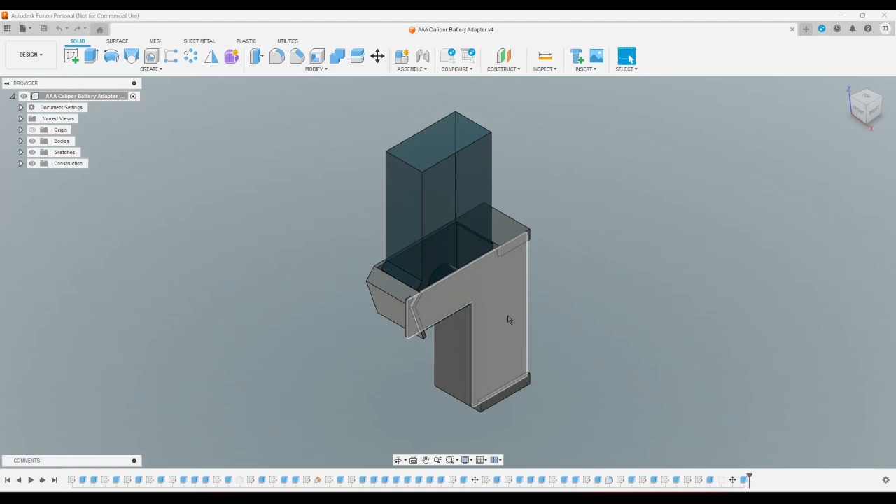Okay, so I think I'm getting closer to something good.

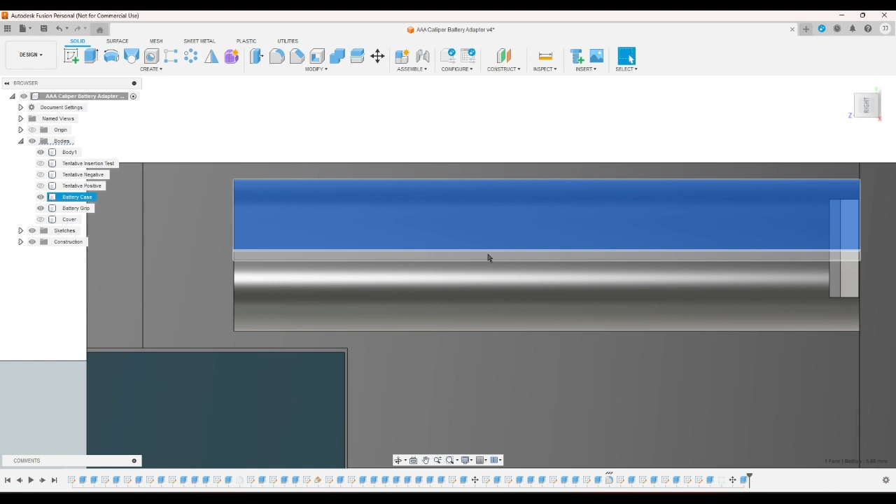But now I need to change this hole here to be bigger, just a little longer, so that the battery goes in and out the way it should. At least the way I think it should.

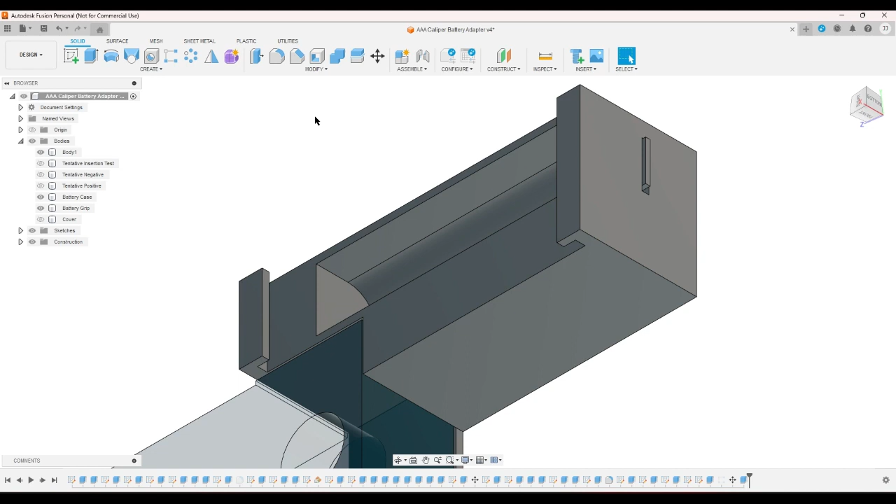So honestly, I can just extrude this by like negative some number, like 5 millimeters. That's quite a lot.

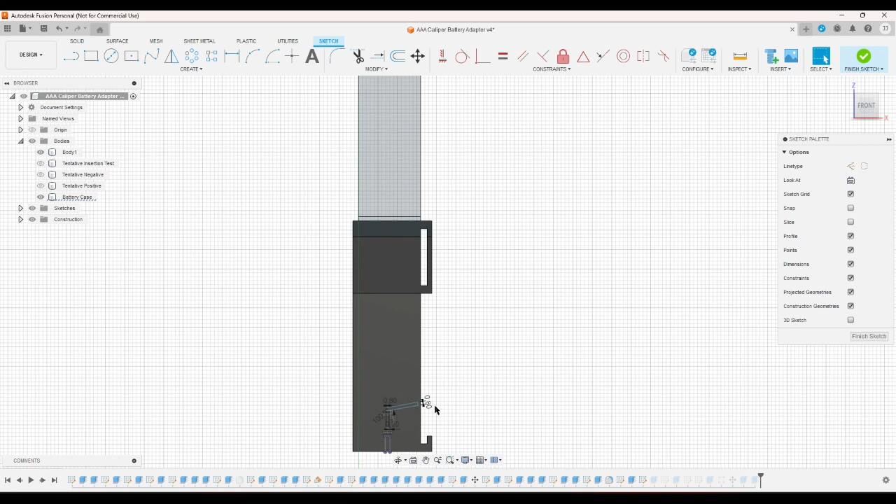And then if I change this so that the angle is more like 110. I don't know, I'm just eyeballing it here.

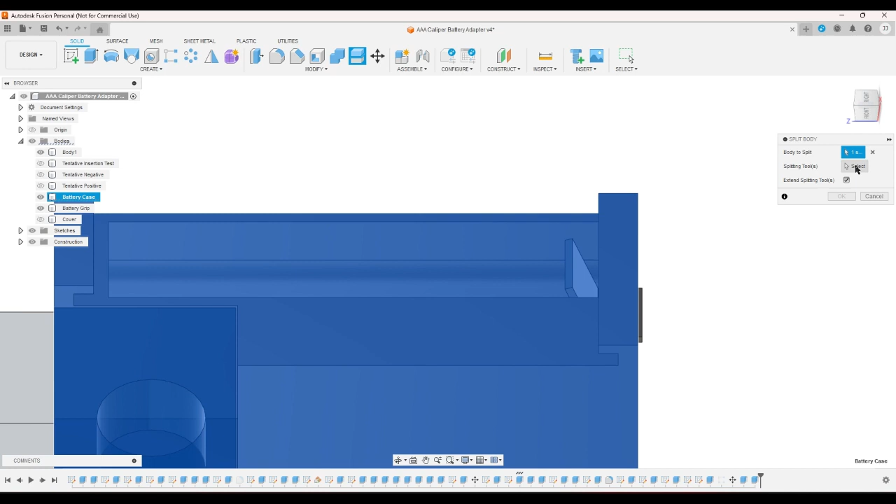And then I go ahead and I split this body using this plane. Alright.

That ought to be enough for me to test whether the thingy works. But now I'm going to go ahead and suppress the split real quick.

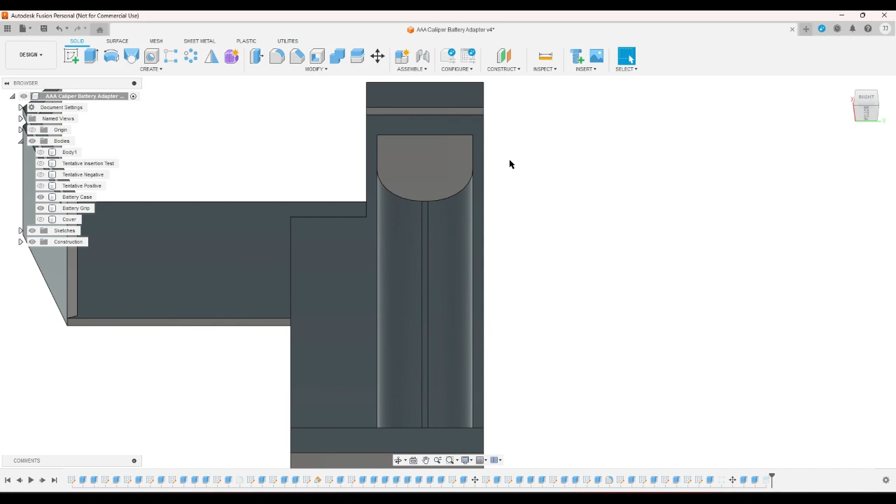Because I want to add a hole that is about here. Let me go ahead and project this line here.

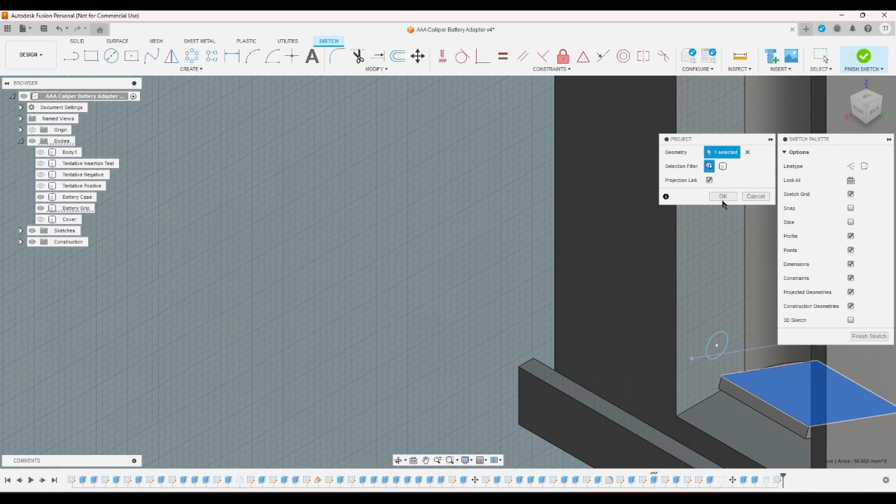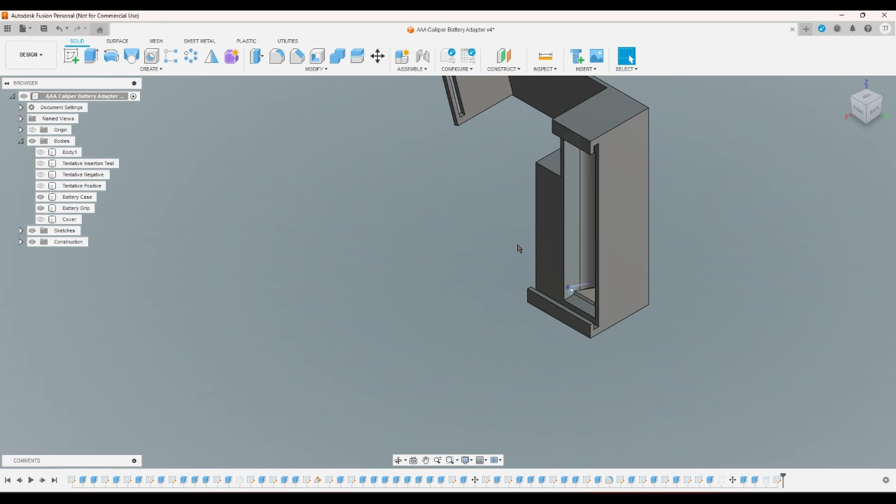Yeah, I'll go ahead and put this hole below the line. And I'm just going to make it 2 - 2 ought to be plenty. That's going to be for the wire that's going to come in on this side, that's going to connect to the battery on this side.

And then put a sketch here. That's also going to be just a hole.

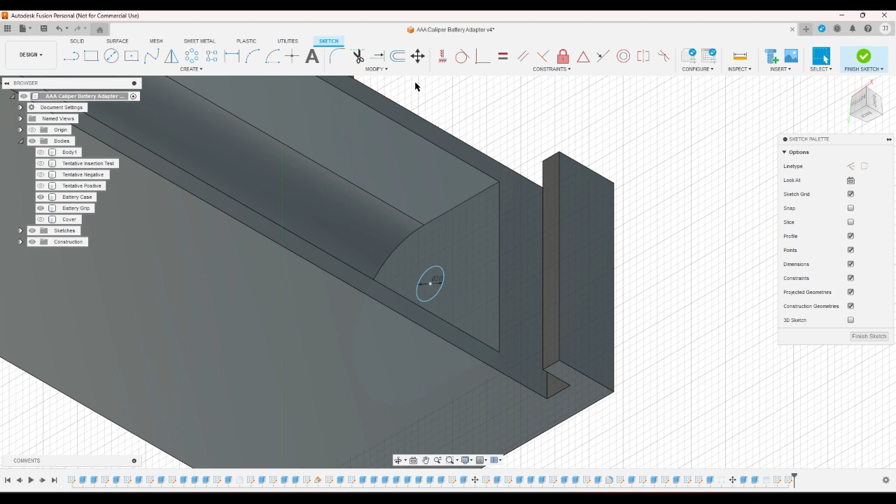Gonna go ahead and put this on the same. Okay. And then

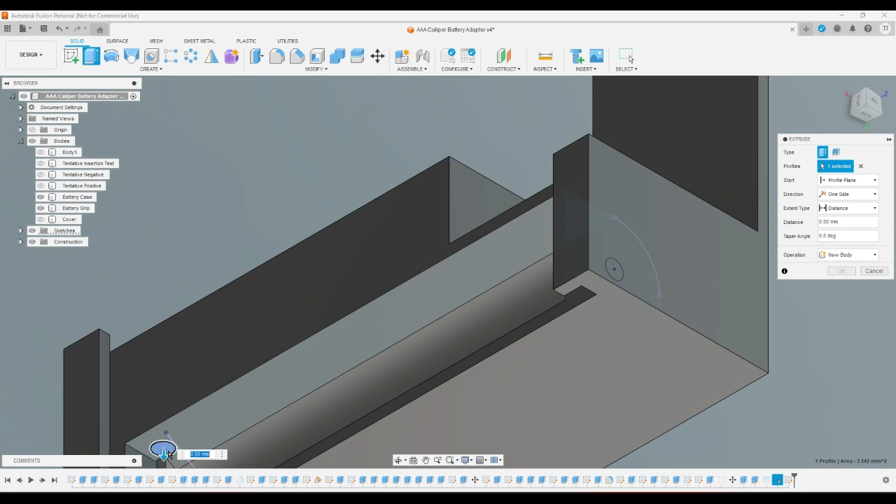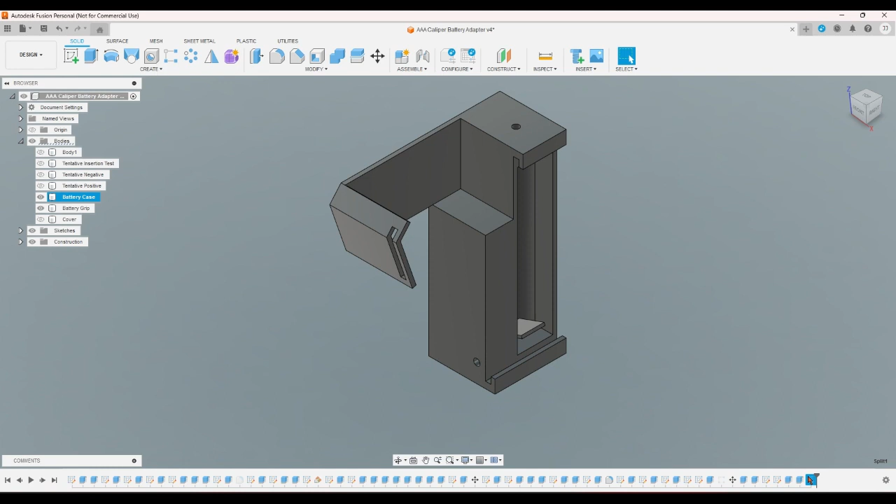Cut that through, and cut that through. Alright. And then move all of this to before the split and then unsuppress the split. Alright.

I may change depending on how I feel. In fact, you know what? I'm going to do that now.

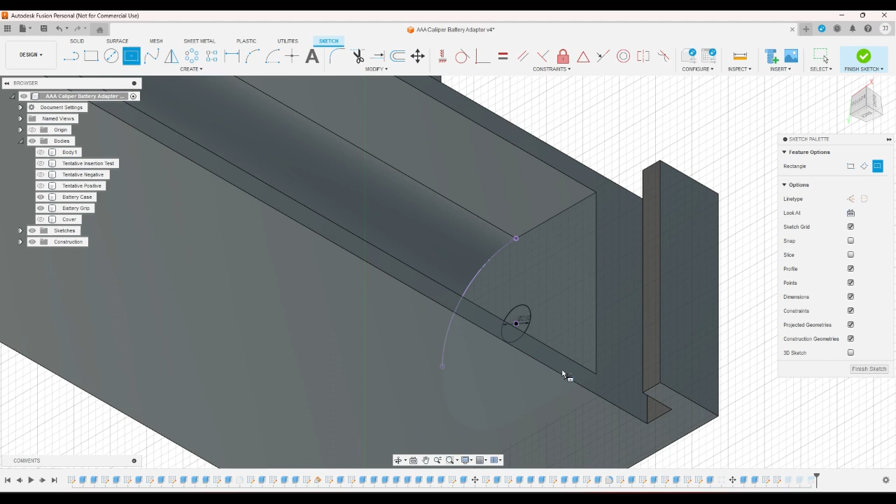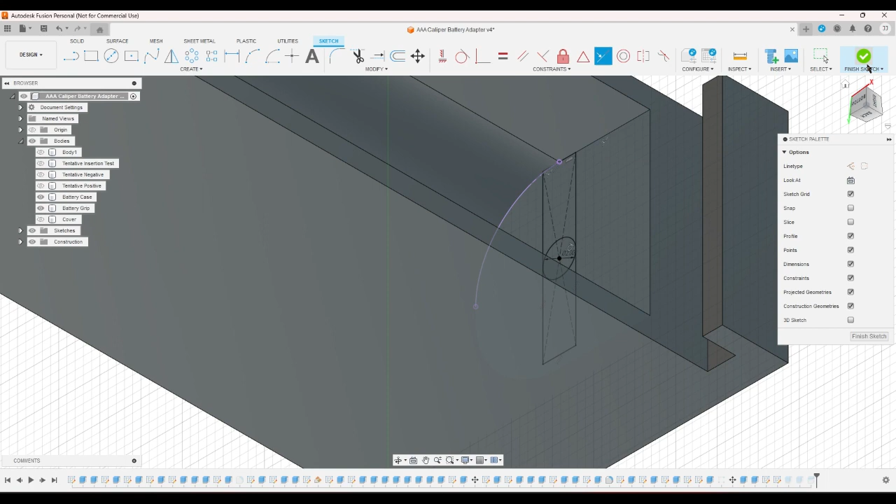Okay. There. And then - wrong one, this one. Yeah, so what that is, that is too big.

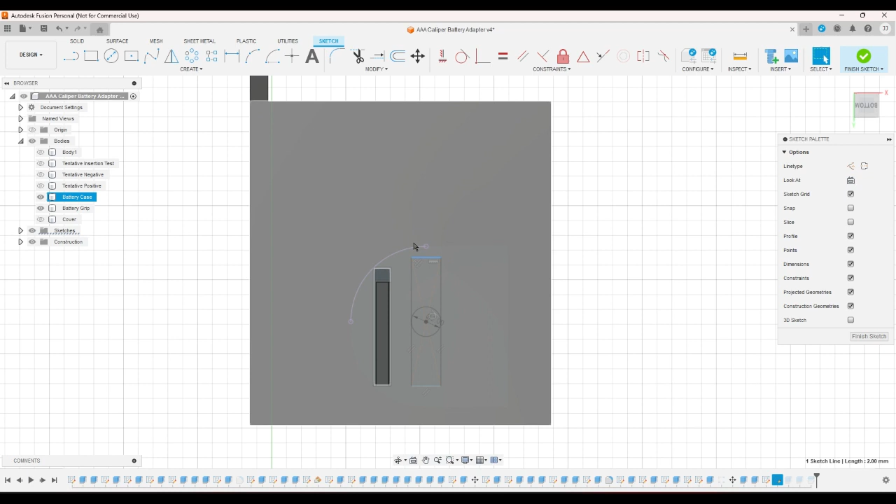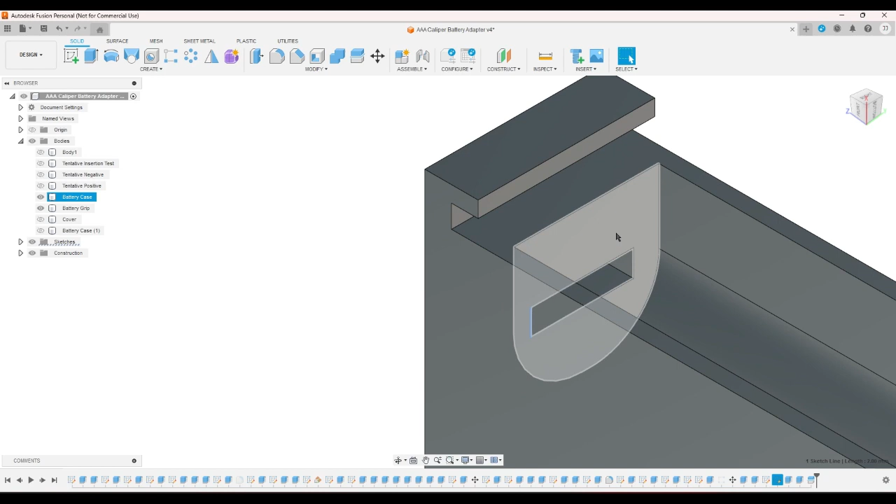Okay, so what that is instead - so the original plan was stick wire through the hole, solder it to a piece of aluminum, super glue the aluminum to this face here, and then do the same thing on this side. That should still work on this side, except instead of gluing it to the face on the thing, I'm gluing it to this little springy bit.

That should still work on this side, but on this side, I think it'll work better if I super glue the aluminum. Let's see, how do I describe it?

So I was going to stick the wire through here and then solder it to the aluminum. And then there was just going to be like this plate, and then they would have to have a glob of solder and wire underneath it sticking out. I'd like for this to be flush.

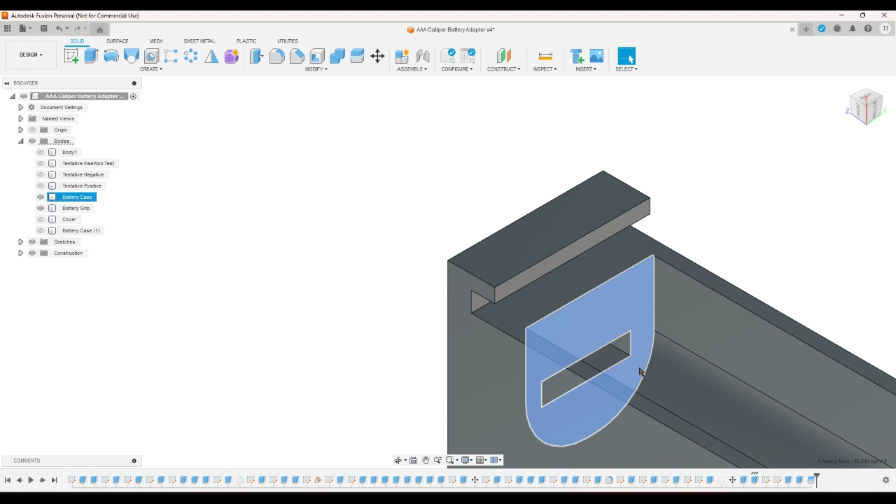So what I'm going to do instead is kind of fold up the aluminum in such a way that most of this face is covered, right? And then it'll stick through into this hole, right? And then when I solder the wire to the aluminum, it should be fine.

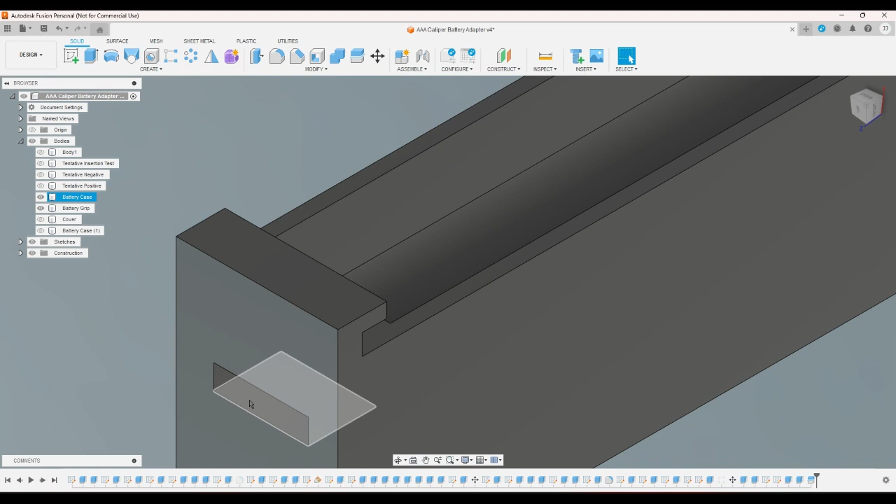Honestly, if I do it well enough, I could fit it in here. Anyways, but yeah, so I'm gonna go ahead and print this and test this.

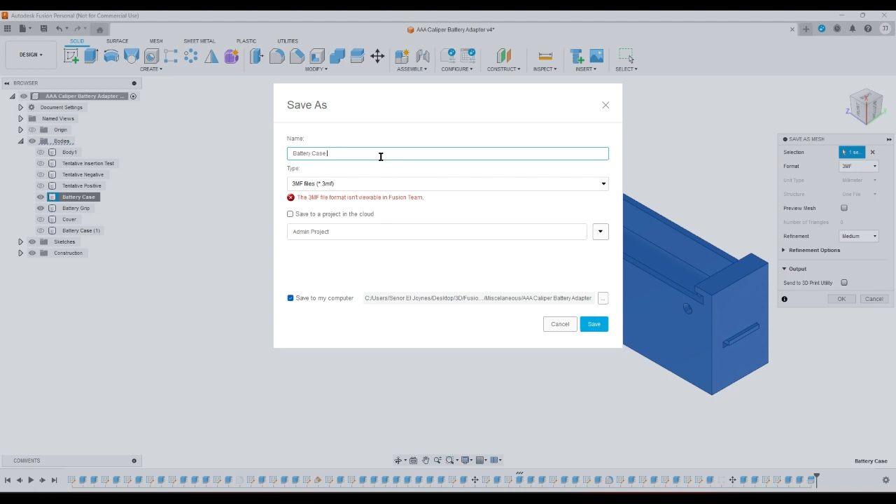So battery case, save that. Battery case test. Battery grip, save that. Battery grip test.

Alright, and then I'm going to go ahead and slice this and print this, and then I'm going to test it, and then if I need to change something, I will change it.

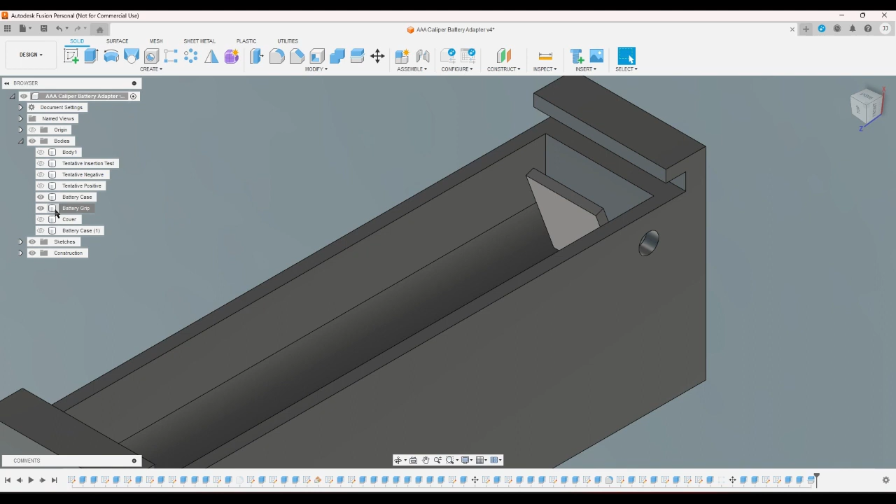Things that I can probably change are this angle here, and you know what? I might want to do that.

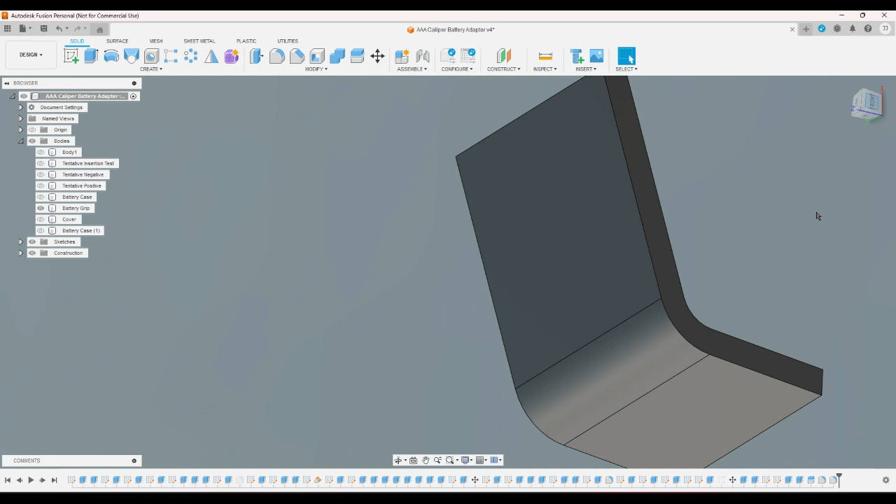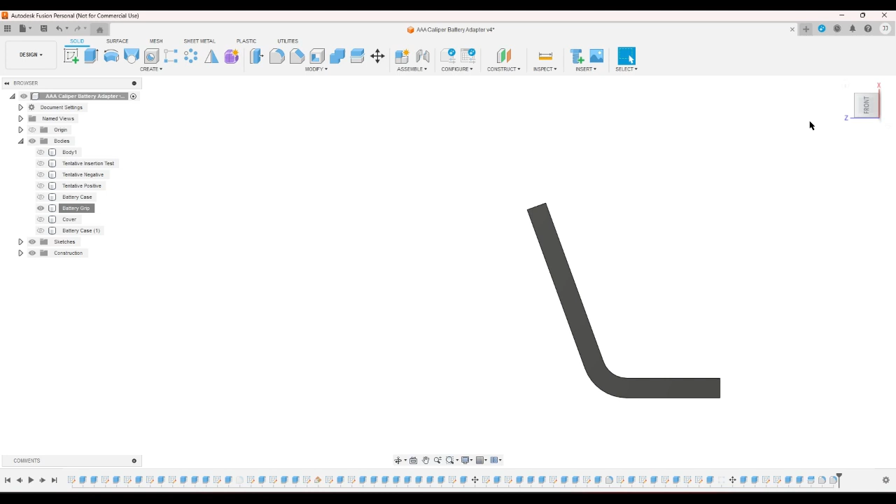Yeah. Yes, replace that. So what that should do is make it less flexible. I'm thinking that's going to make it easier, better at the job that I want it to do.

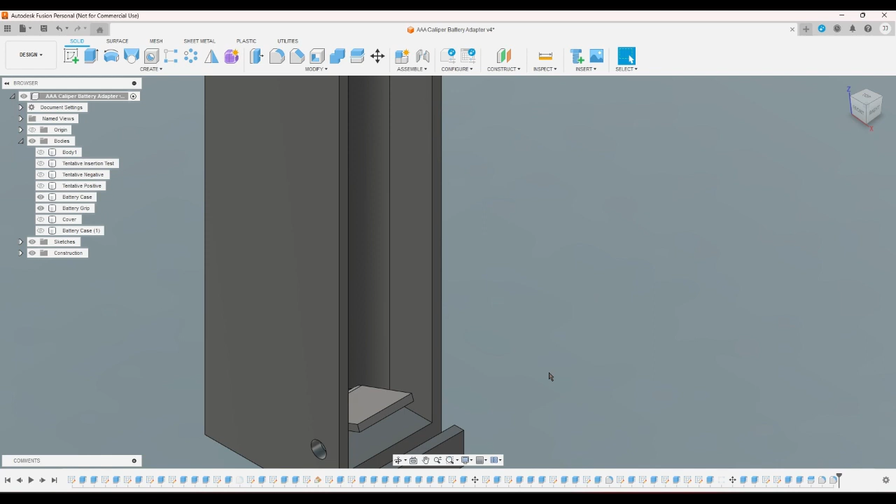Yeah. Okay, so now I'm going to go ahead and slice this and print it.

Okay, let's see. Battery case test and battery grip test.

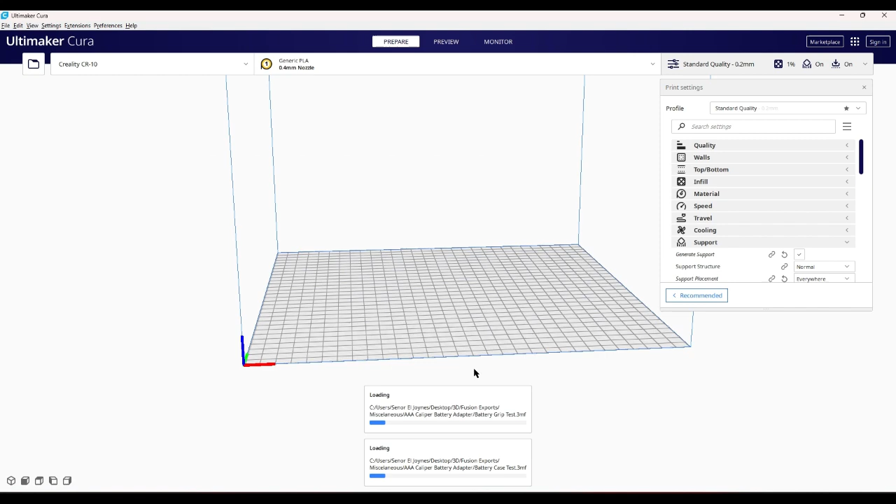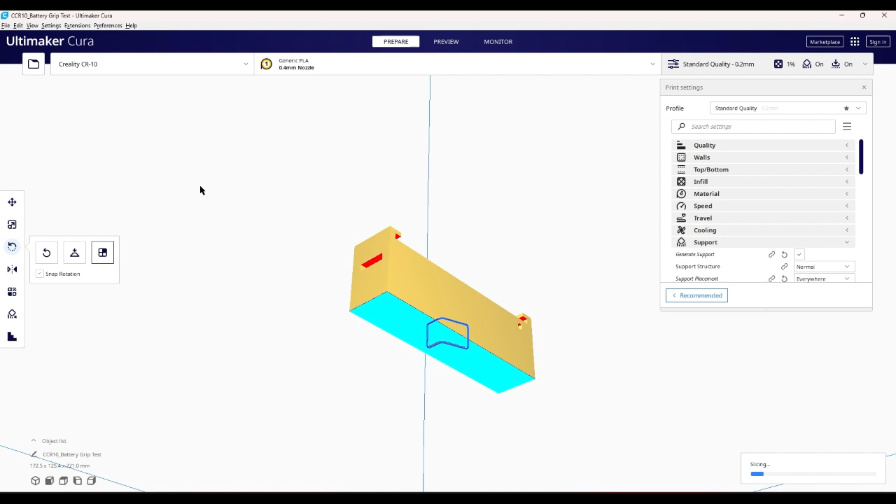This goes on this, goes way the heck up. And then this goes on this, and also needs to go way the heck up, and a little bit this way.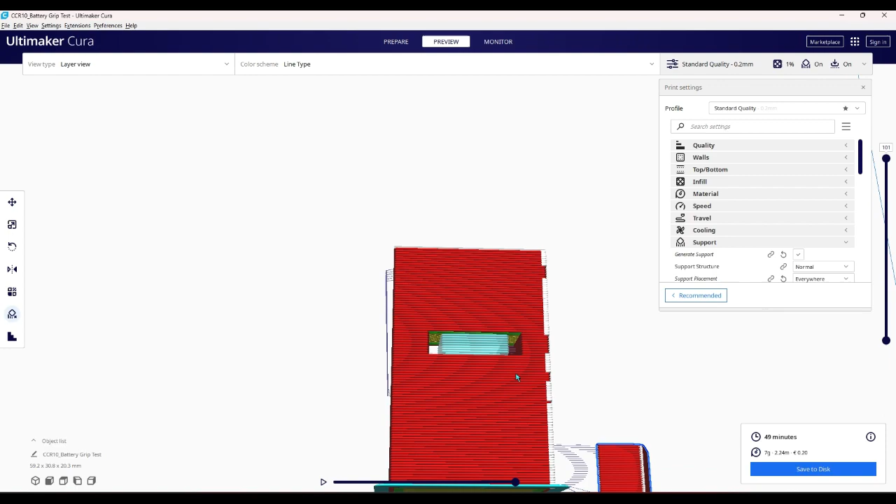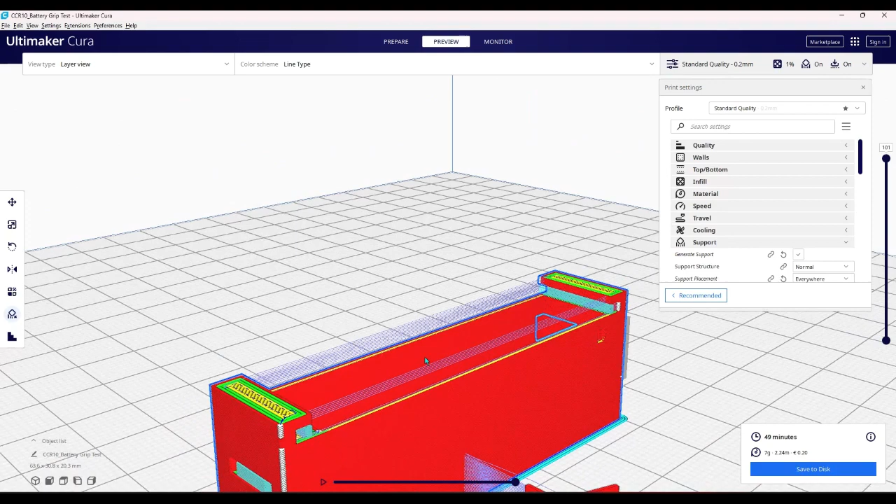Gonna block the supports here. And here. Blocker here. All right.

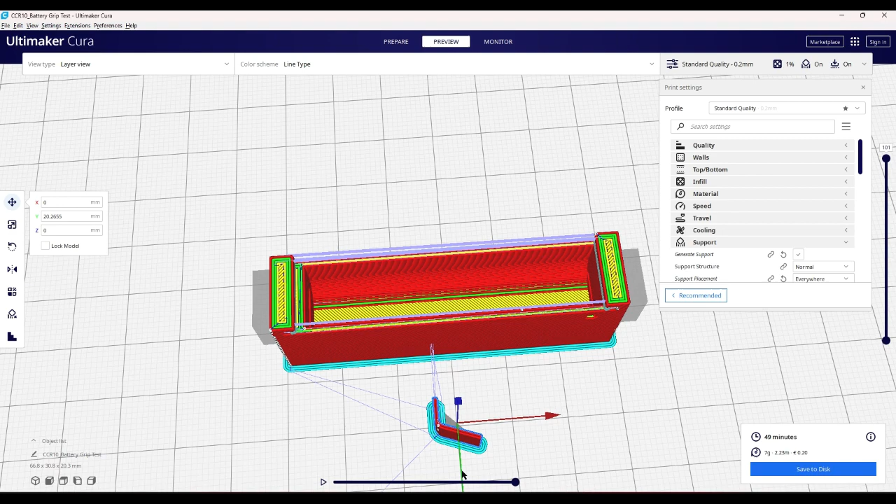And then I'm gonna go ahead and move this close enough to the other one that the brims should touch. And that way, this one pretty much has no chance of falling over.

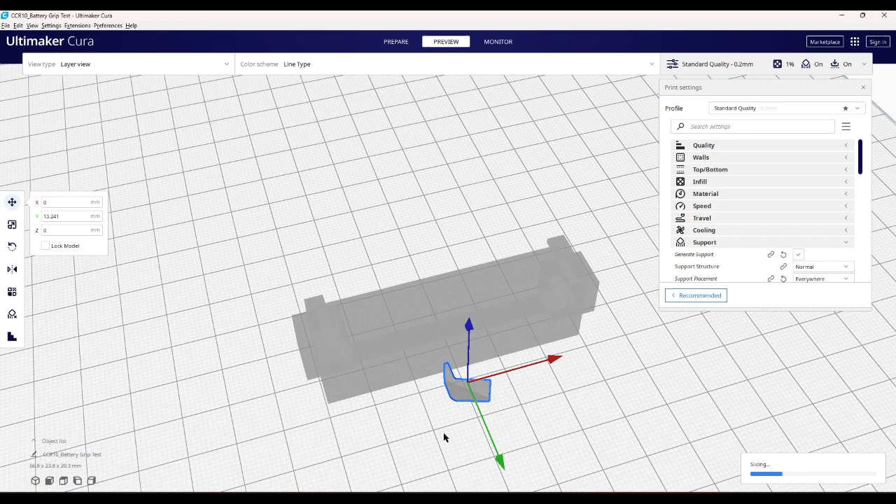Why is it taking so long to slice all of a sudden? Oh God.

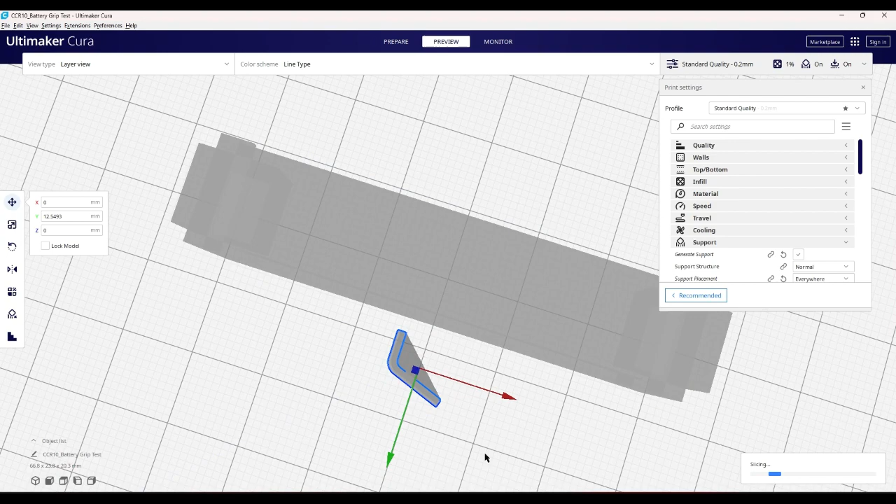So how does the support blocker work then? Is it like... Huh, whatever. Okay. And... not quite touching. A little more. Yeah, that was good. Okay.

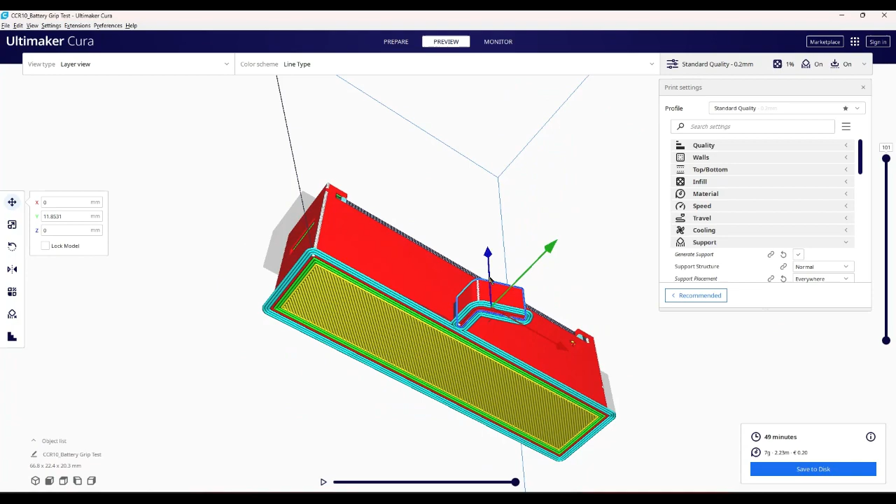See, because now in order for this to fall over, it would have to either completely disconnect from the brim or bring down the whole brim, which it's not gonna do. I don't think it was gonna fall over anyways, but, you know, extra security.

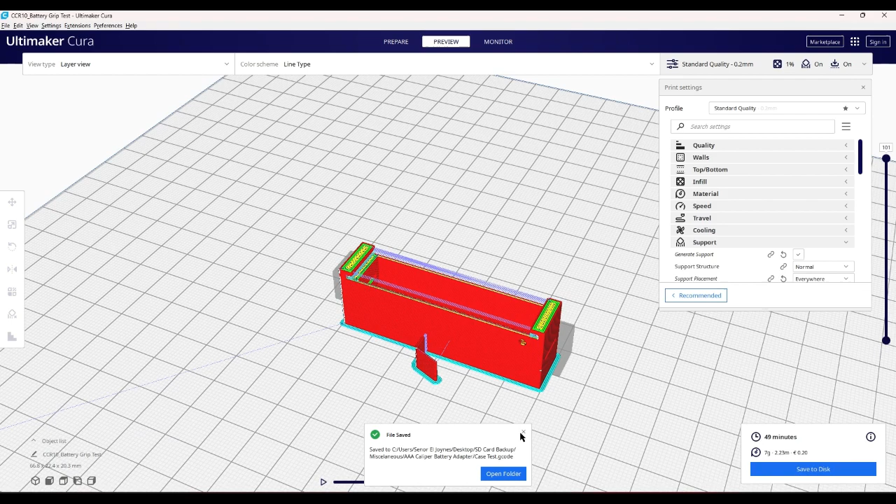Okay, save this to case test, I guess. And then I will hopefully have something I can test in about 50 minutes.

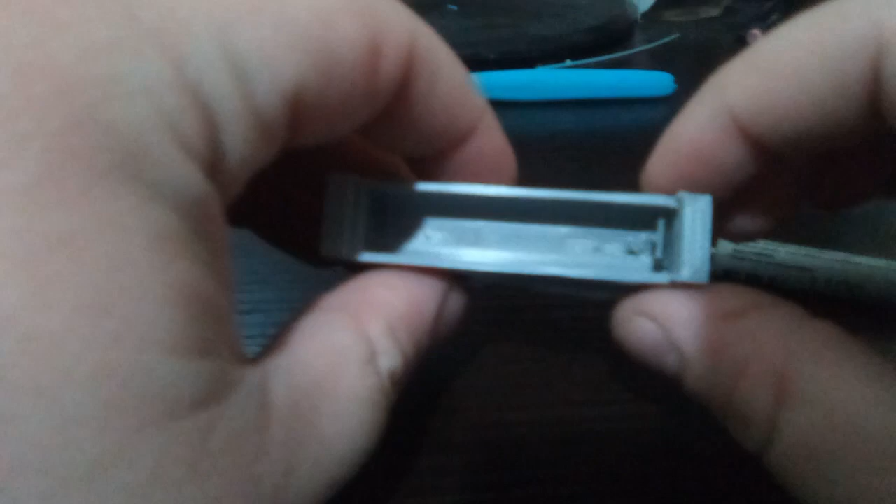Okay, so this case test got printed. I've got the little springy bit in there, and it springs. It's too long though, so I gotta make it shorter. But it's also a little too skinny because it just won't - it grabs on a little too tightly to the battery from these ends.

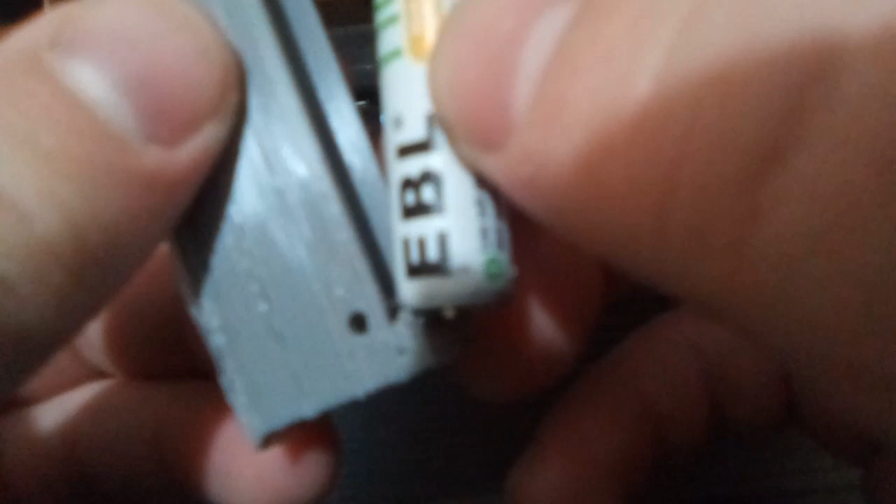But if I put it in this way so that it doesn't go all the way down - if I put it in like this, the spring springs, so that's nice. So I just gotta change the length and width of this, but everything else should be fine.

The holes here, where's the... here it is. I can fit a wire through the hole here, and then that could in theory go here. I can fit the wire through here, and then that could come back out like about there. Yeah, like about there. And then that would be able to be how I connect the battery to the actual caliper there - calipers, whatever - using a piece of aluminum foil soldered onto these wires.

So, I forgot to change the print settings though for these, and so it still has print quality issues. I'm gonna try printing it hotter because I think it's under extruding, and if I print it hotter, then the flow...

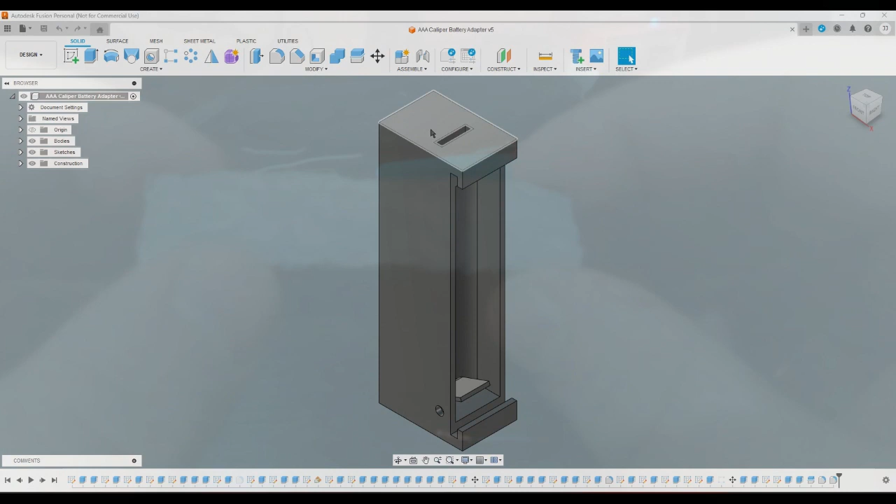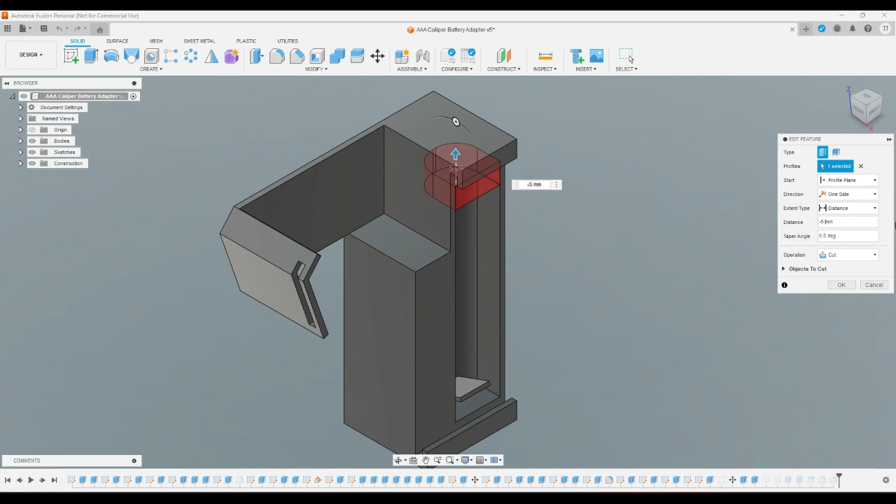Okay, so I should just have to change two little numbers here. So that would be okay. Minus 6 was too big. Where's the... so let's try 2. And then...

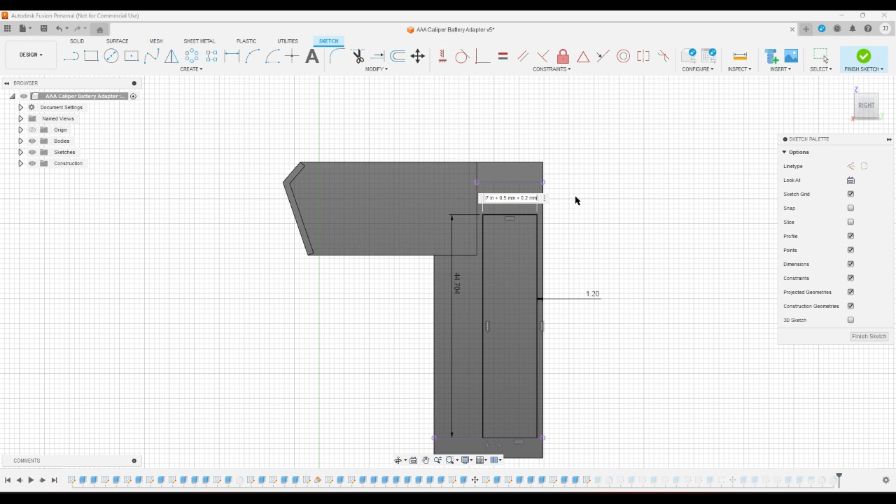Where is... is that it? Okay. That needs to be bigger by just a little bit more. Space plus space 0.2 space millimeter. Okay. All right. And then that will make this 1 millimeter on this side, which is not that big a deal, but meh.

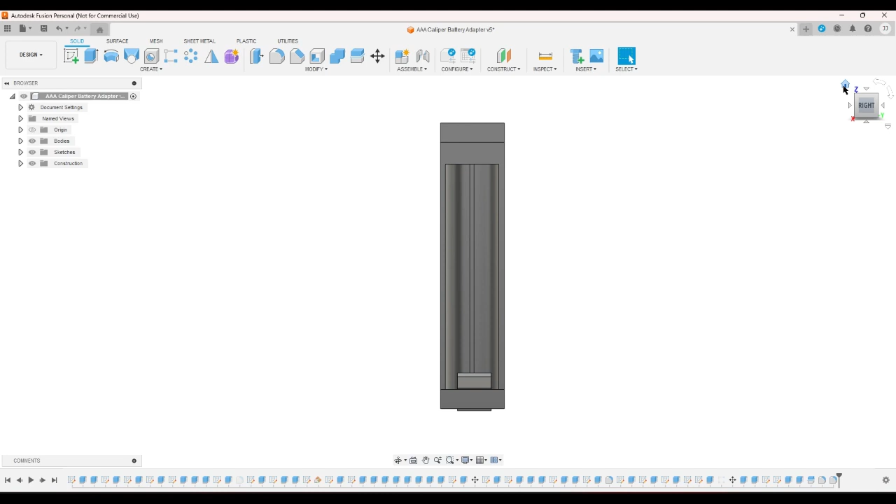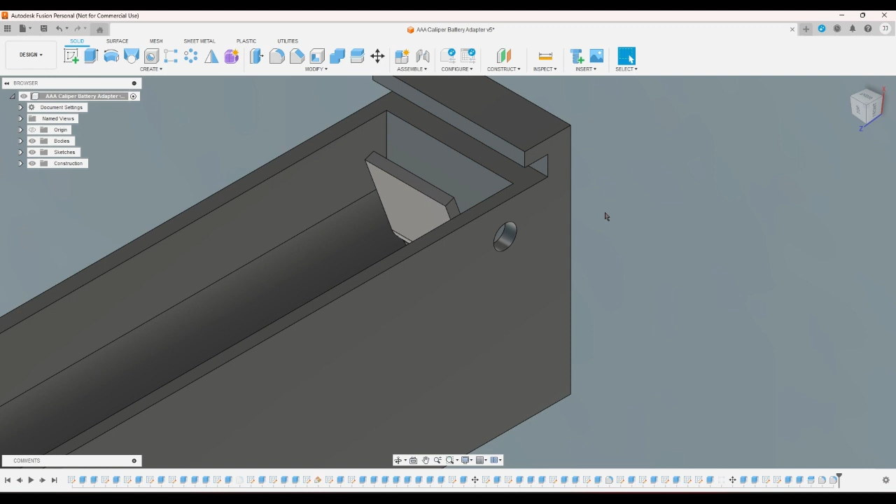Because those were the issues that I found, I am happy with this. I'm not even going to print another one. I'm just going to reuse the other one that got printed.

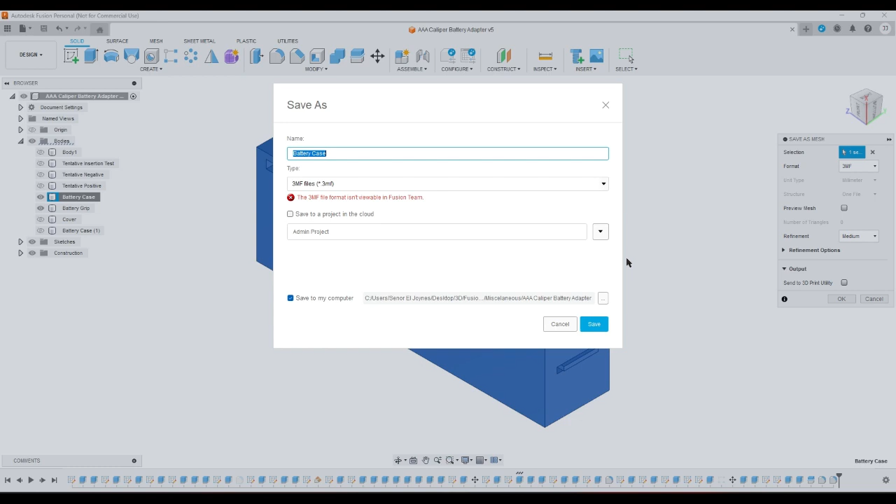So, yeah, and then I'll see how well this works. So save here, and I'll go ahead and slice this. Yeah, replace it. Okay.

So minus 5 was too much for expanding the size of this slot. Minus 2 may be too small, but I don't know. I gotta find a sweet spot there.

Anyways, I'll go ahead and get this sliced then. And on the slicer, I'm gonna have to remember to change the settings in order to try and get things to work properly. I am noticing right now that these issues are on the same side as the other print.

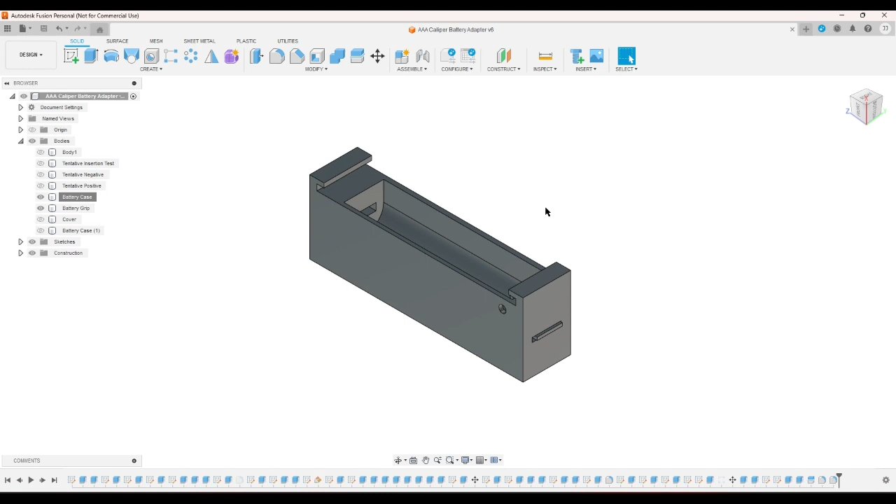I'm looking at the printer real quick. And the part cooling fan is on the side where the issues are. So maybe it's getting too cold too fast? I don't know, maybe increasing my temperatures will work. But anyways, time to go ahead and slice it.

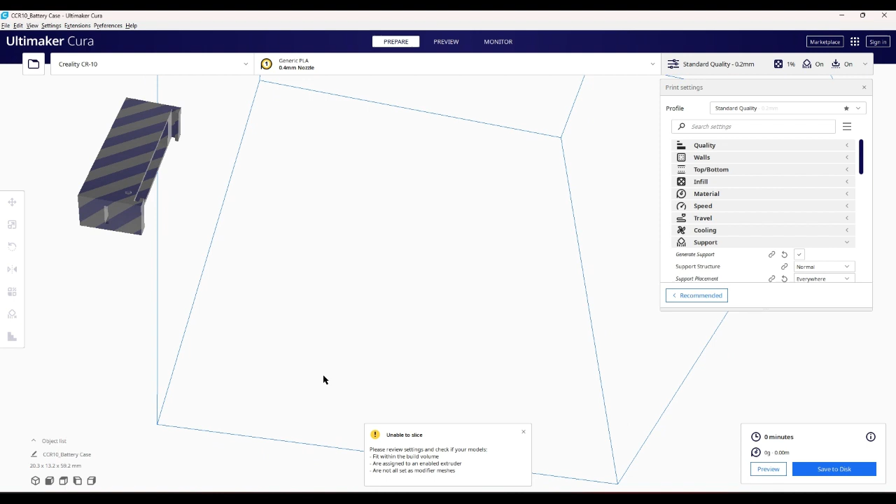Okay, so open up the, it was case test, right? Battery case test. No, it was battery case, wasn't it? Yep. Yep, that's got all the... Okay.

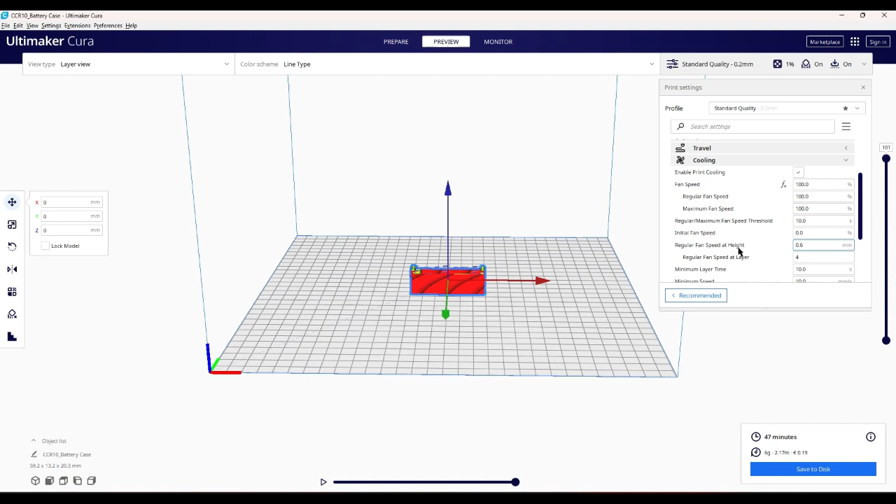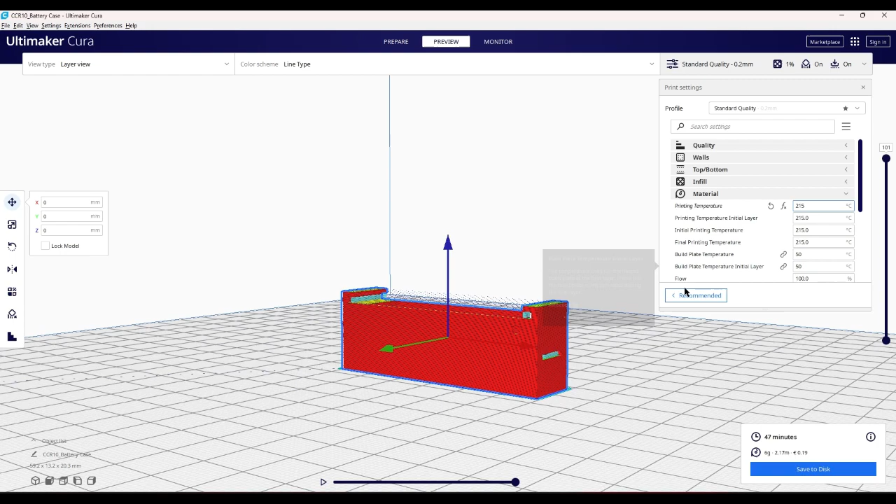Alright, and then let me change my... I mean, if it was the cooling fan causing those issues, lowering the fan speed would also work, but it's... I don't know. It's because I usually run at 215 anyways, so, I mean, I'm just gonna do that anyways. This is, oh yeah, that's why.

Maybe if I change the cooling, go to 95%.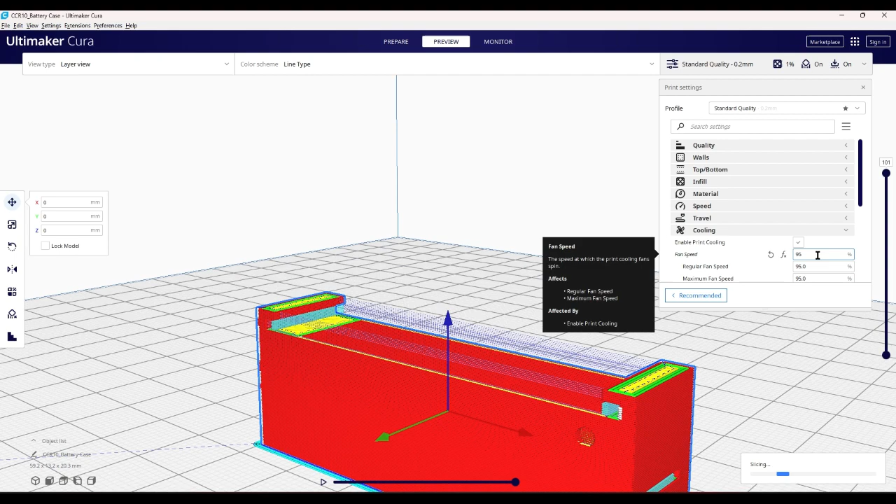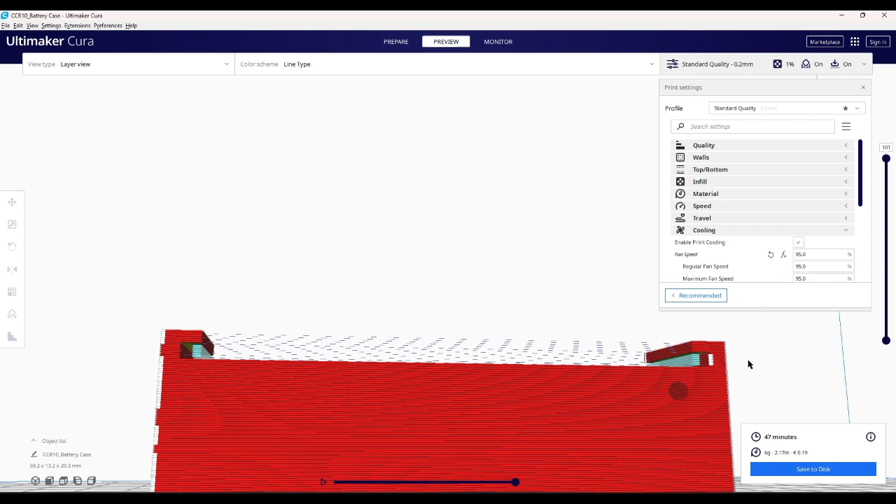That'll make it much hotter. So two things will probably happen: this support will be much more difficult to remove, and these sags, these overhangs, will probably be more saggy, which will make it more difficult to remove.

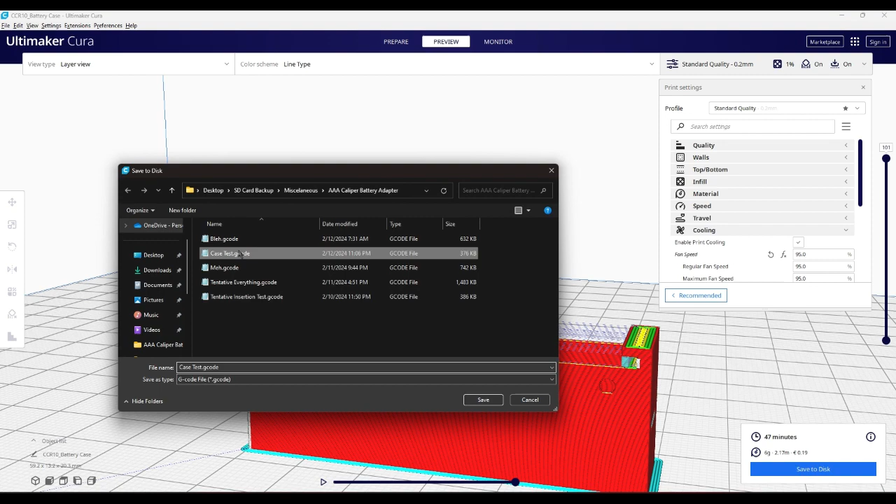But I'll go ahead and save this. Case test, save, yes. Okay, and then I'll go ahead and get it printed and see how well it works.

Alright, I got it printed, and it worked well enough that I'm gonna keep this. I'll demonstrate everything in a minute, but I just want to show that it does have a pretty stable, pretty solid electrical contact.

So if I were to touch the ends here, can you see it? And there are those numbers right there. So, it's good.

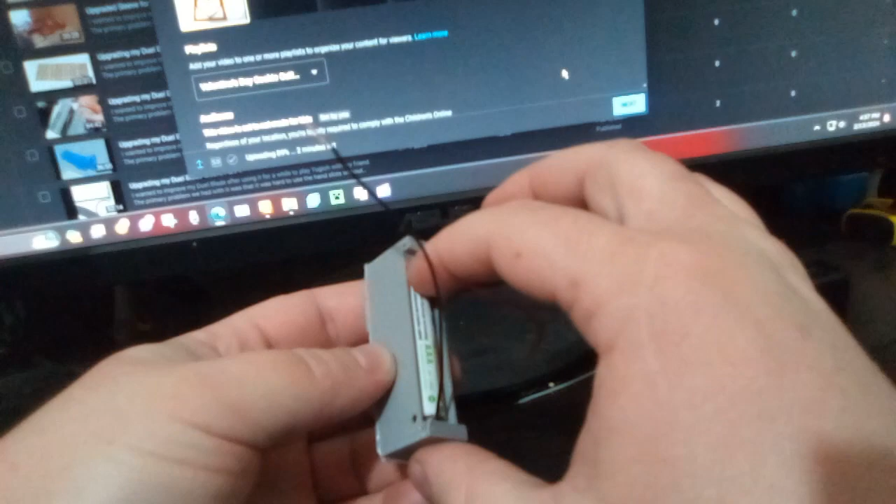It's not falling out, and it requires intention to pull it out. It doesn't just slide in, right? I have to push it in, which means that it's going to get a solid contact. So this dimension, it's good.

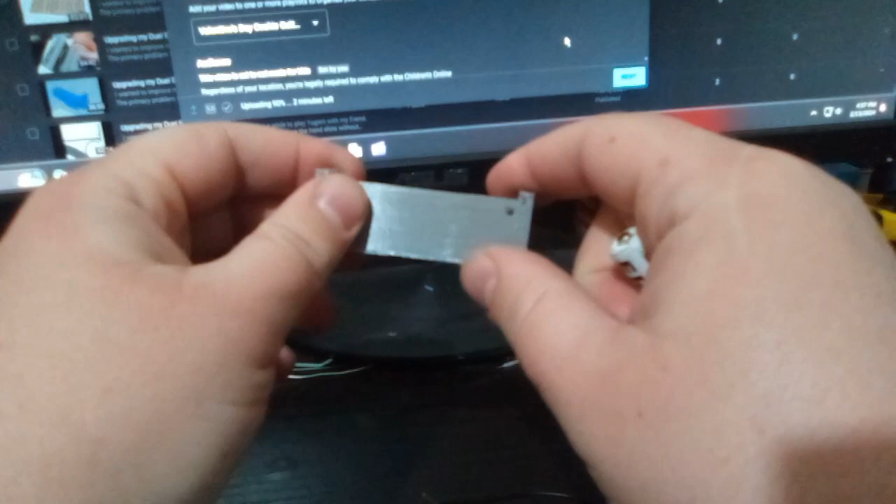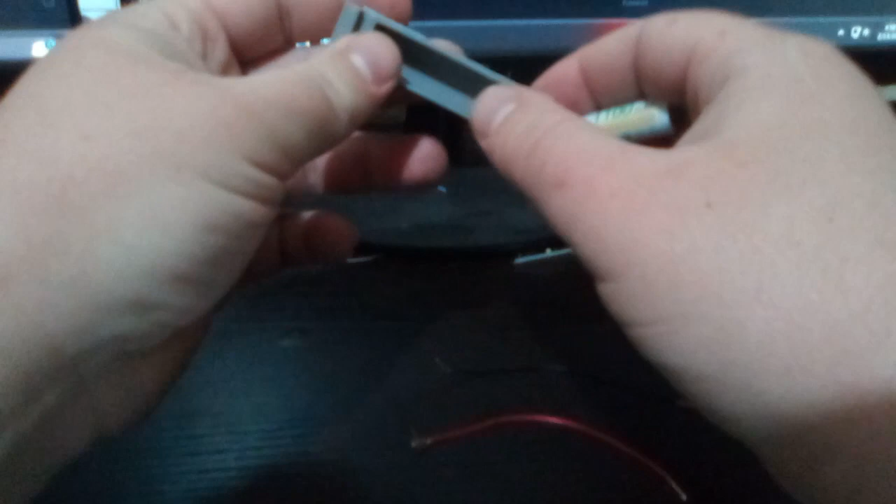I just realized that what I have done here is designed a 3D printable battery enclosure, so now I can add batteries to anything I want using the same technique, which is exactly what I'm doing here. It means I can maybe make powered devices now, if I really get the money to buy electronics.

That's awesome, actually. Anyways, I'm keeping this. So yeah, this goes in, comes out fairly easy. The springs, right? And it goes in pretty easy, right? It doesn't come out so easy.

You can do that, but once you put the foil on it, that'll add enough thickness that shouldn't be an issue. But doing this isn't something I should really do, since this is a lithium ion battery. Those are not the best. I mean, it's fine, but you shouldn't do that to batteries. Anyways, that isn't an issue once the cover's on it.

So now all I gotta do is print out the whole thing, I guess. Unsuppress that split there, print out the whole thing, get it on top of here, and do that.

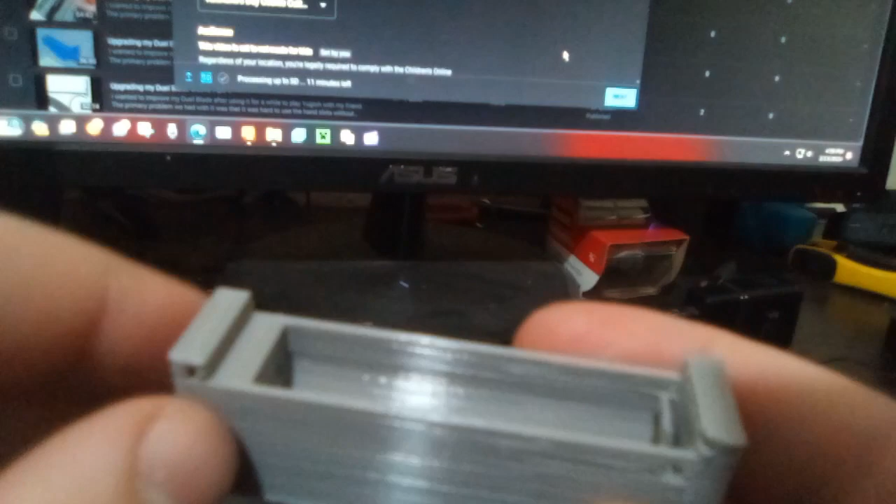Print quality is a lot better. I turned down the cooling fan and turned up the temperature, and that made the print quality a lot better. There still is a noticeable difference between this side and this side, but it's not a big issue.

But yeah, it's a lot better. Maybe slowing it down this time will make it better, so it has a higher quality, but I don't think slowing it down will change too much. So yeah, that is this here at this point.

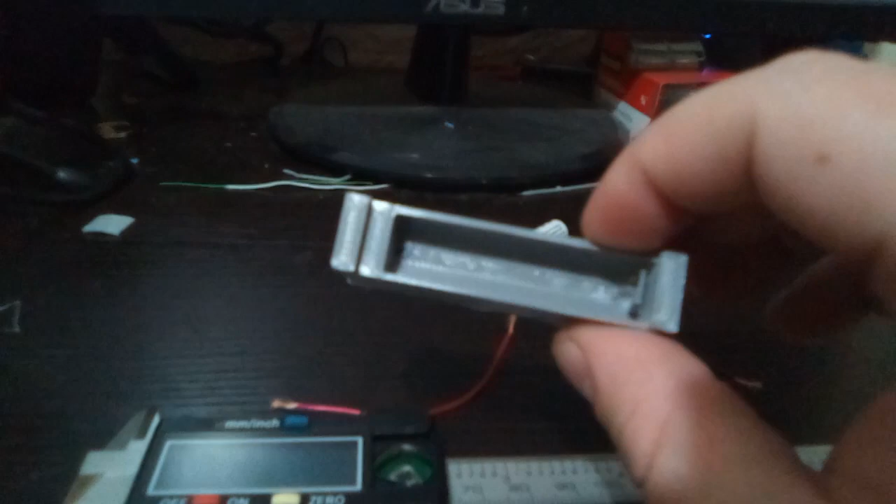So my next thing is to print out the whole thing and then get the pieces soldered in. What I'm gonna do is make sure it works before I solder the aluminum and this together, by doing what I just did, putting the battery in, touching the wires to everything, making sure everything is secure. So I'll do that, and once that's good, I can solder everything together.

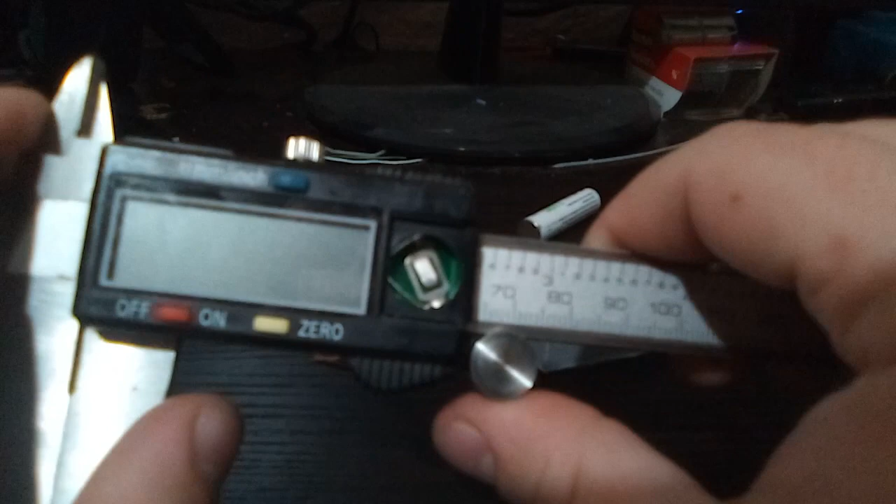And it should work. I am going to have to solder the wires directly to this, unfortunately, because tape is not going to work. I tried tape like three different ways to Sunday, and it's not a secure enough connection, so I will have to solder it. I can always desolder it if I want to remove it, but it's fine. I just gotta hope I don't burn anything underneath there, which I really shouldn't, because once the soldering iron gets hot, I touch it there, touch the solder there, and boom, it's done.

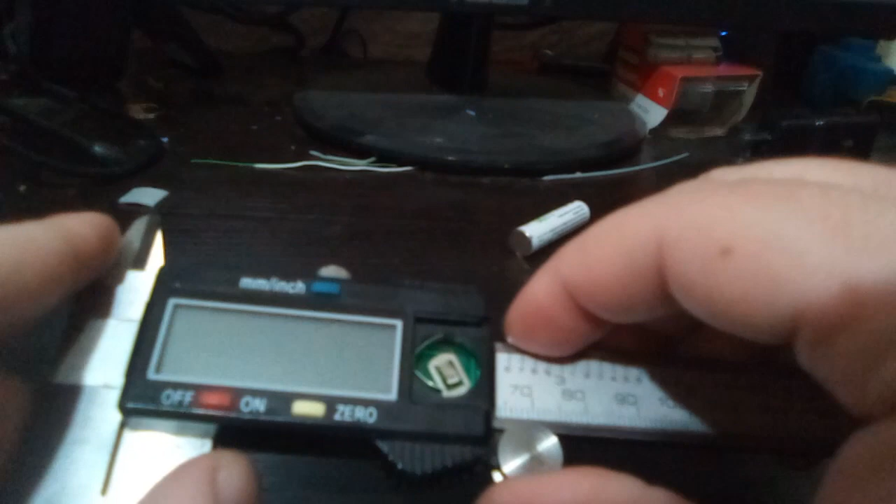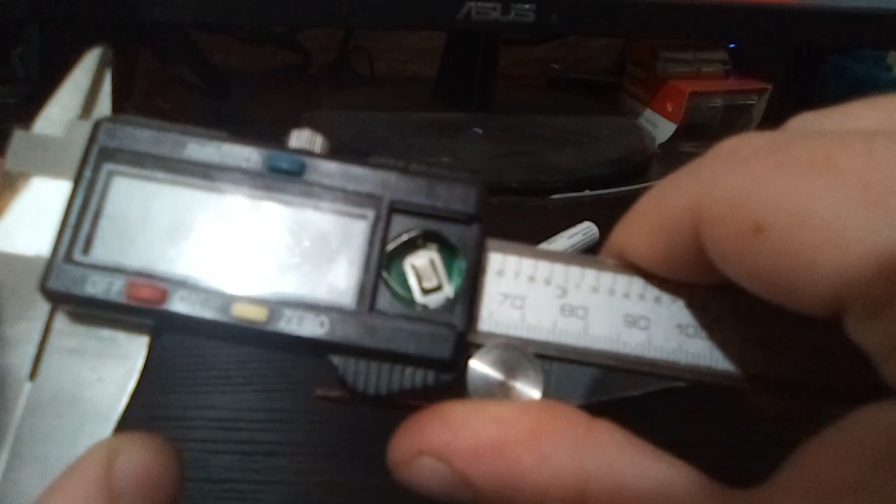But yeah, I'm not gonna record myself soldering because this camera has very crappy resolution and I cannot see any of the electronic components through this that I will have to be avoiding when I solder.